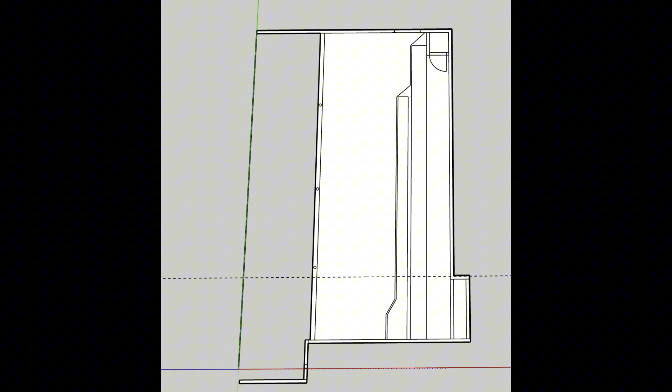Okay guys, we're going to get into basement framing around the ductwork. Anyone that gets into interior carpentry gets a basement remodel job, or just, from start to finish, just a basement framing, which is all pretty easy. This is the layout of the ductwork in the basement.

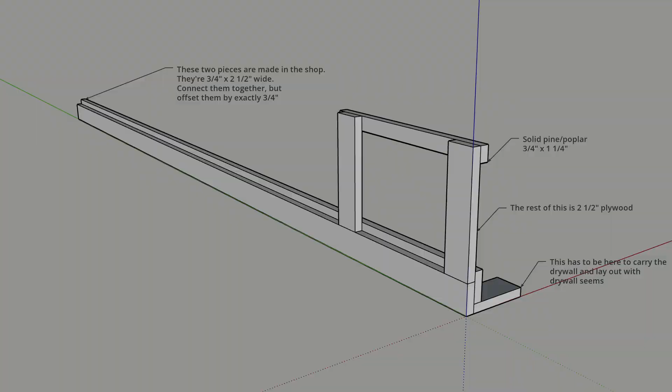When you get to the point where you've got to frame around the ductwork, everyone kind of scratches their head, like, what's the best way to go about it? And I think I've come up with maybe a pretty good way of going around all that ductwork. It minimizes the space, and if you look closely at that drawing, go ahead and pause this video and look closely at these drawings that I put out.

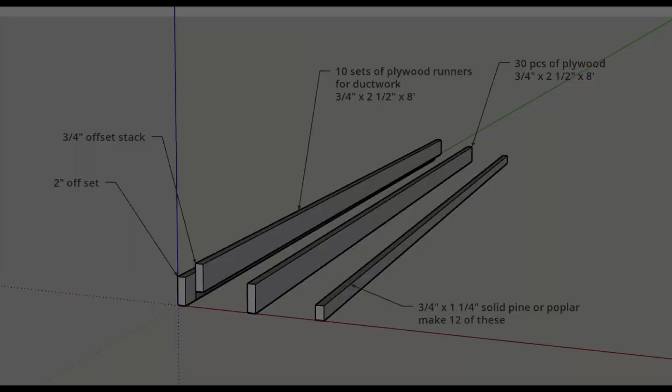But basically, it carries the sides and it carries the bottom, and then see, they're offset by 3/4 of an inch, or the thickness of the plywood that you're using. I like to go with 3/4 of an inch stock, because it's just a little strength, a little more area to run your screws into.

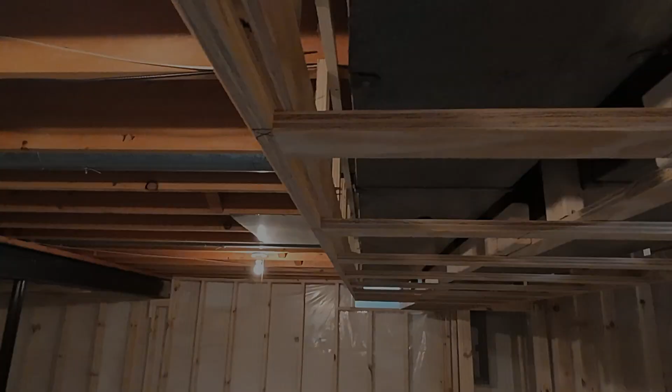And when I see most guys, they like to use solid 2x2 material from Home Depot or something, and it looks all cattywampus. It splits, it's crooked, and looks horrible. And you know what? This turns out pretty darn nice.

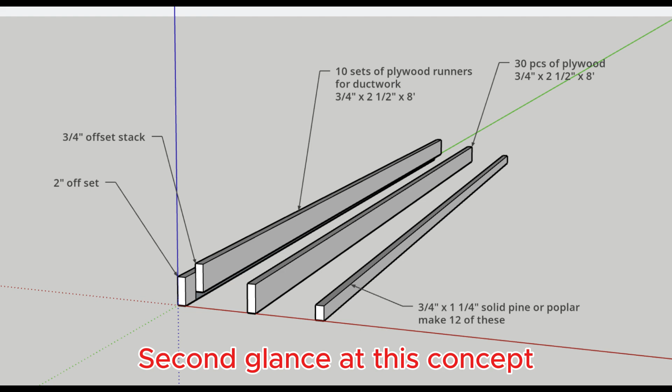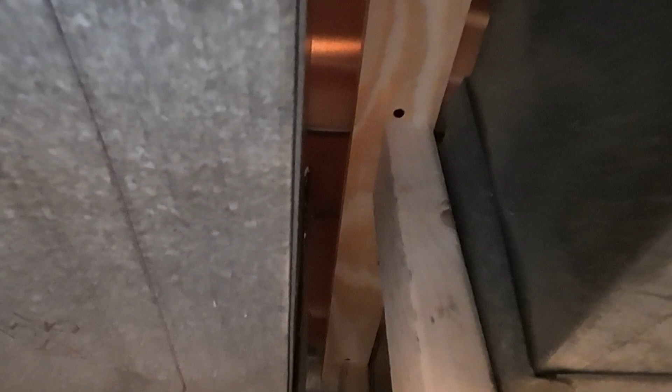I didn't want to bore you with what I do with the lasers down here, but basically I come up with the highest and the lowest points of the ductwork, and I go just a little bit lower so it doesn't touch the ductwork. And off of my laser, I can get this stuff nice and flat and level. And then I can have some infrastructure in there where I can run some screws, make sure that it's not going to sag with the drywall.

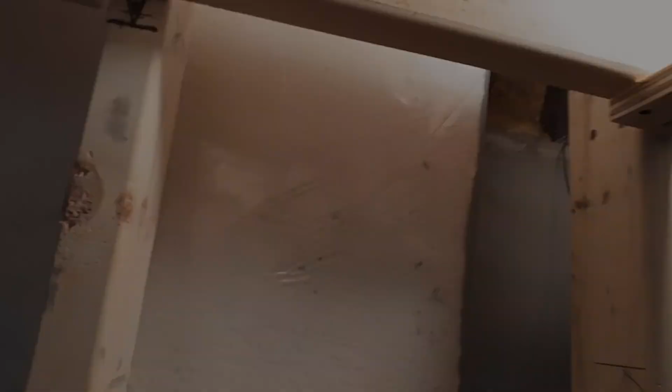Do everything 16 on center. And since it's a little bit wider, like 2.5 inches, and that's basically my go-to number here, it'd be pretty hard to miss it with a screw. So that is a plus.

When I get all done, I go ahead and run screws everywhere, and you can actually hang from this. I'm 160 pounds, and I can grab a hold of this and I can hang from it. So it's definitely going to hold the drywall up. It's not going to sag.

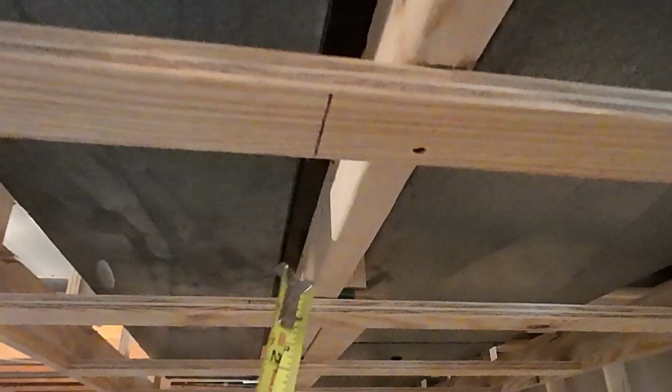Then I run these black register marks, like 16 inches off the edge of my work, and then I use a laser, and I run that laser and make sure that it all lines up with that black line. And then I just kind of tie up the loose ends, where it comes with an angle, or if it starts to shrink down. I try to minimize all of the unnecessary room around the ductwork and mechanical.

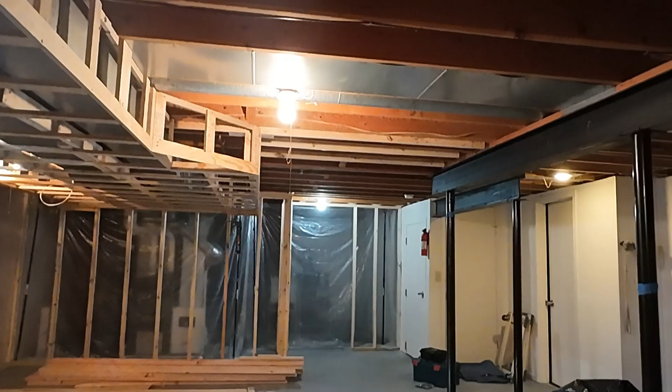In this area here, I was actually maximizing it because I had a couple of things to go around, like plumbing and some miscellaneous ductwork. But I used the same stuff. I had made up maybe 100 or 150 feet of that stacked plywood, and then maybe another 100 feet of 2.5 inch wide strips, and it turned out pretty nice.